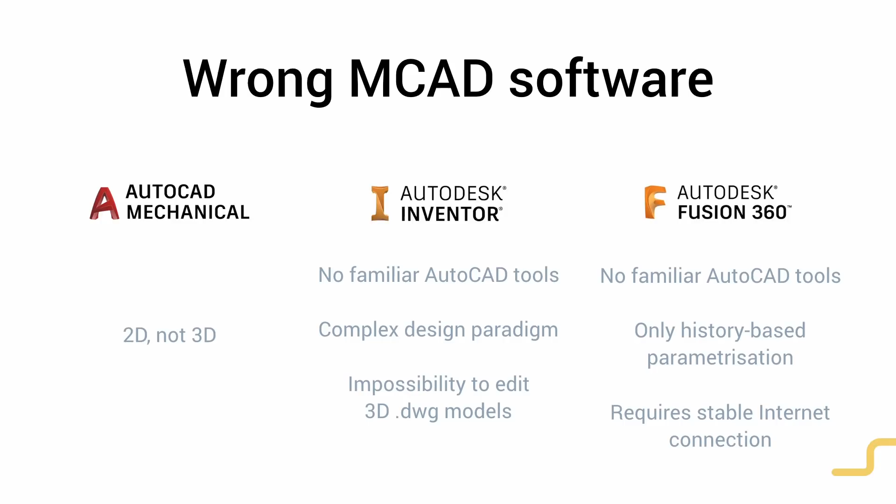What is the right choice? Let me list. First of all, of course, the right mechanical design software for DWG users should be AutoCAD compatible. It should contain all familiar tools on board. It should support Lisp and .NET and C++ API. It should allow you to run vertical applications and so on.

Also, it should be fully blown 3D, of course, not 2D. You should design parts, assemblies, sheet metal in 3D, and you should generate drawing views from 3D models, not draw them manually. It should be easy to learn, intuitive and powerful. Easy to learn means that it should be familiar to you. Even before you start to use it, you already know a significant part of this software.

And of course, it's very important to edit any existing DWG 3D solid geometry, but also any imported 3D geometry, because there is a lot of 3D mechanical design software on the market, and you cannot avoid collaboration with your suppliers and partners. They will definitely use some other software like SolidWorks, Solid Edge, CATIA, Creo, and so on. And you have to be able not only to exchange data with them, but also to edit imported geometry. That's very important.

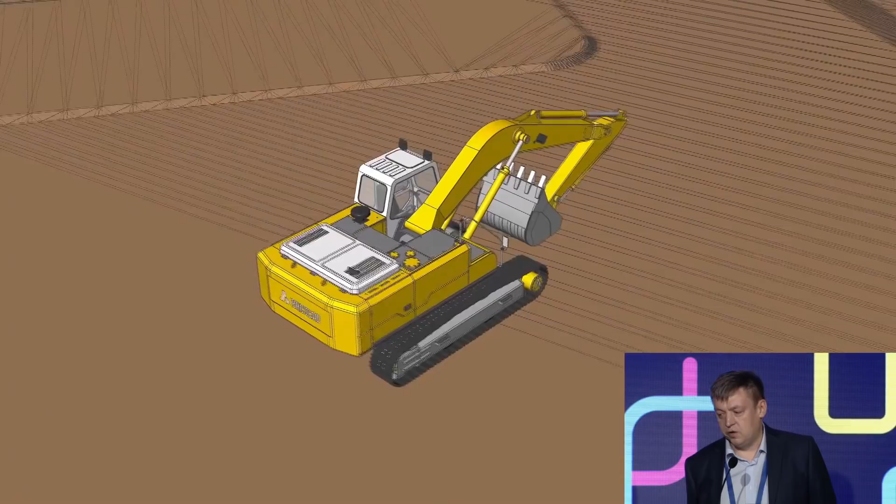And now, let me present the main hero of our session. This is the 3D model of the excavator. We created it in BricsCAD from scratch till the last bolt and nut. We assembled all parts together. They are parametric. We modeled all kinematic joints. And this movie was recorded using the BricsCAD AnyPath tool, which was extended in version 19 with the possibility to make parametric animation. In a couple of seconds, you will see this excavator start to move.

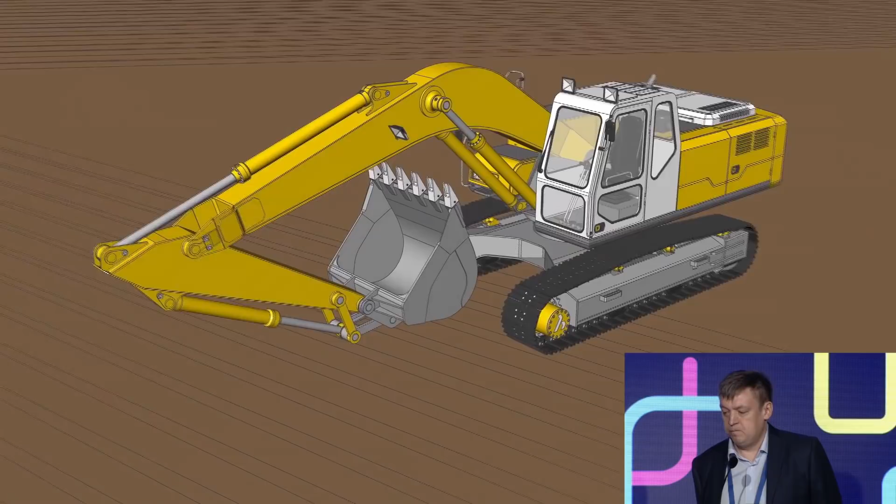And this movement is driven by parameters. We specified connections using expressions. We specified links between different parameters, and it allows us to model that. In fact, we modeled everything, including, for example, this planetary gear joint. So it's possible with BricsCAD with no problem. Of course, we also modeled the main purpose of this excavator. It should move its boom and bucket and do its job, and of course, this is also possible. This is modeled.

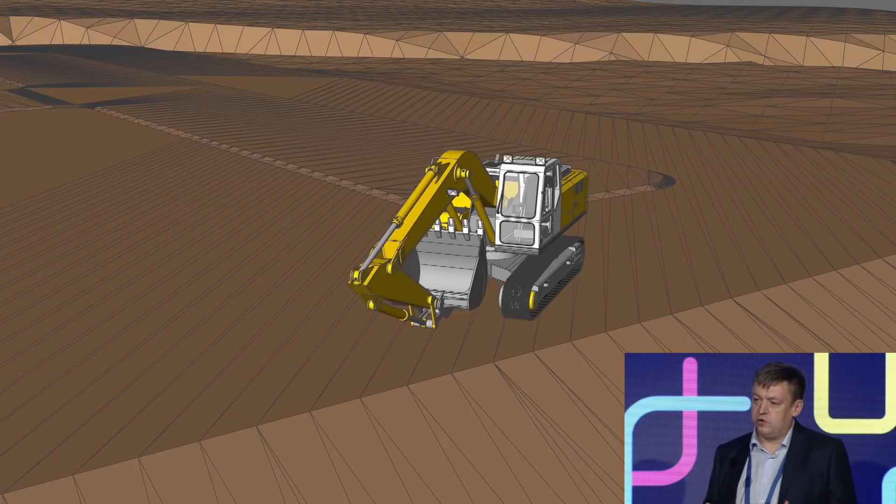Okay, the rest of our session will be just a live demo of different aspects of the BricsCAD Mechanical product. We are going to start with showing you some possibilities of direct and parametric modeling in BricsCAD. And to do that, I'm inviting on the stage my colleague, Alexey Kazakov, who will show you, with the help of another colleague, Ilya Tadarnikov, how easily it can be done in BricsCAD Mechanical. Okay.

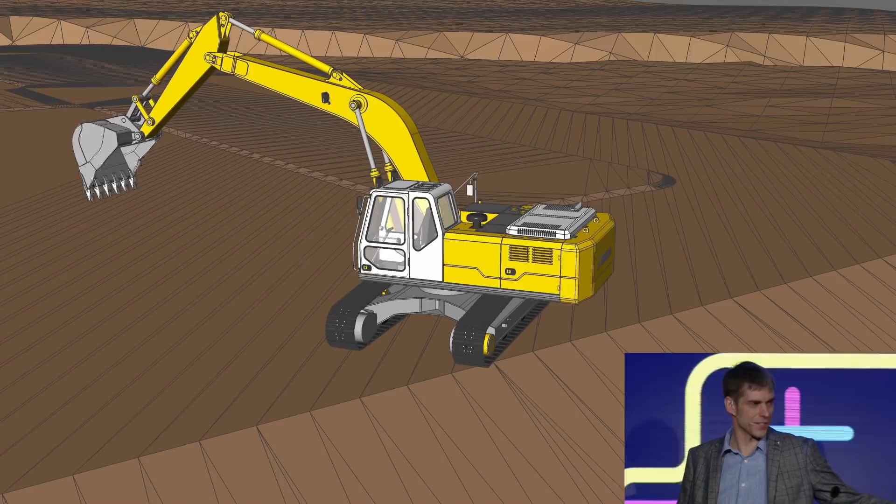Well, Dmitry, thank you for introducing me. Together with my colleagues and Dmitry, I was involved in development of the parametric toolset and direct modeling toolsets from the very beginning. And now I'm really happy to see how the area of applications of these tools extends. But now we're going to focus with Ilya on demonstrating how parametric design, 3D constraints, and direct modeling can be applied in a mechanical design context.

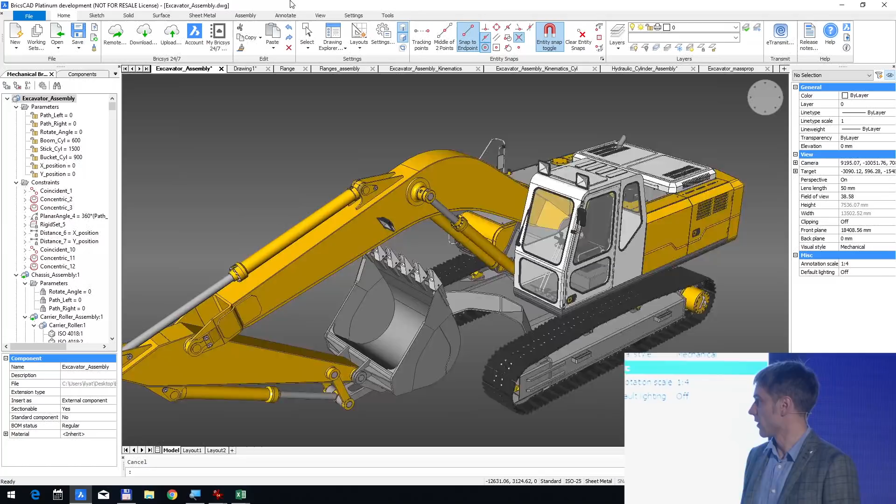So let's turn back to our model of the excavator and assume as an excavator manufacturer we're going to create a customized version of this model for one of our clients who intends to use it for, say, trench digging. This target requires replacing the bucket model with a narrower version than the one currently installed. And we will show how direct modeling can be applied to customize, to change this bucket.

Let's start changing it, and we start from the original model we received in SolidWorks format. We import it using our Communicator product, and now we will use the direct modeling toolset to change it. Direct modeling assumes that the designer interacts with the model using selection and direct manipulation of faces. So that's why selection tools are very important. Here, Ilya started with the assembly model, and to make it editable, we have to explode one of the components to get 3D solids. So this black bucket model, the bucket solids, will now be changed.

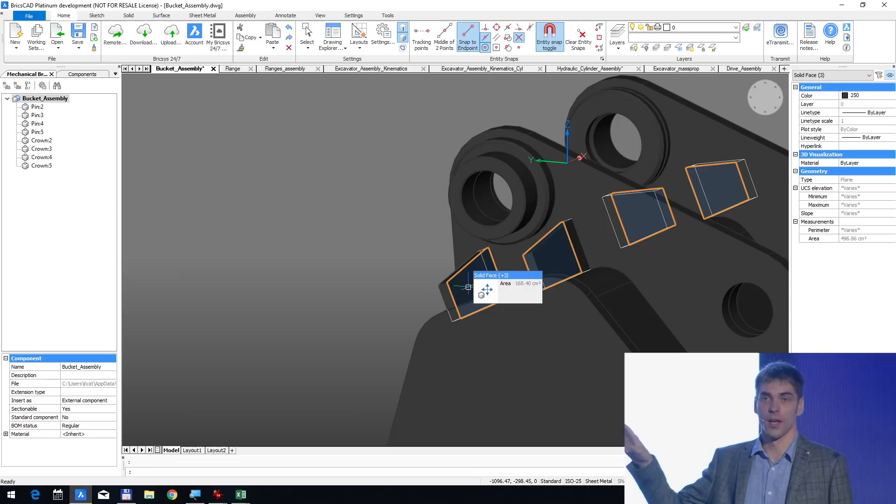Here you see this important selection tool where you can set your view correctly and use window selection to select precisely the faces and solids you need. And afterwards, using the manipulator object, we just displace the faces by the required distance. That's how this object can be changed and how the bucket can be made more narrow. An additional modification that we are showing now is extension of the stiffener at the top of the bucket to make it stronger.

And this is done using extrusion, and while extruding you can type the values or use snapping, whatever you need. All the power of all the regular tools are also here. So that's how we created a more narrow trench-digging version of our bucket.

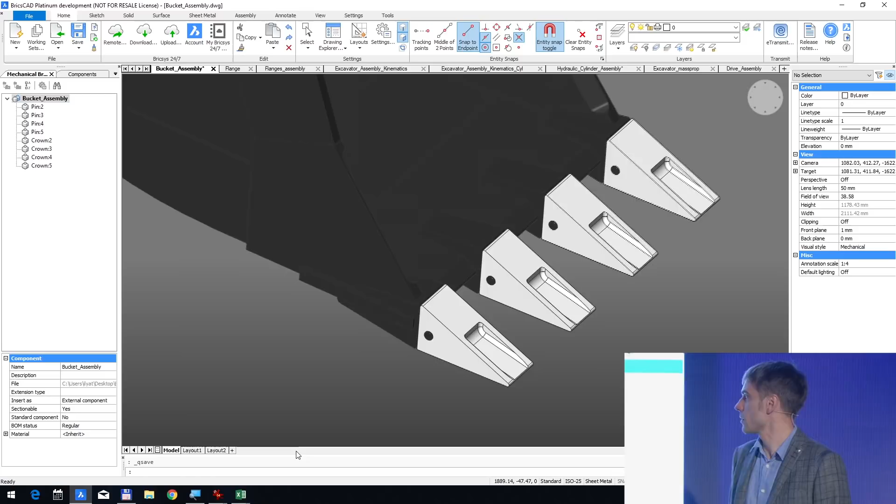And now another thing, let's assume that our client is going to use this bucket in conditions where a lot of rocks are met in the soil, in the ground. And that's why we need to customize one of the tools, or we better call it tooth crown, as we're in UK. So that's tooth crown, we're going to customize it and change it to make it of very specific form. So first we extract the profile of one of the side faces to start from, and hide the original object to not obscure the view.

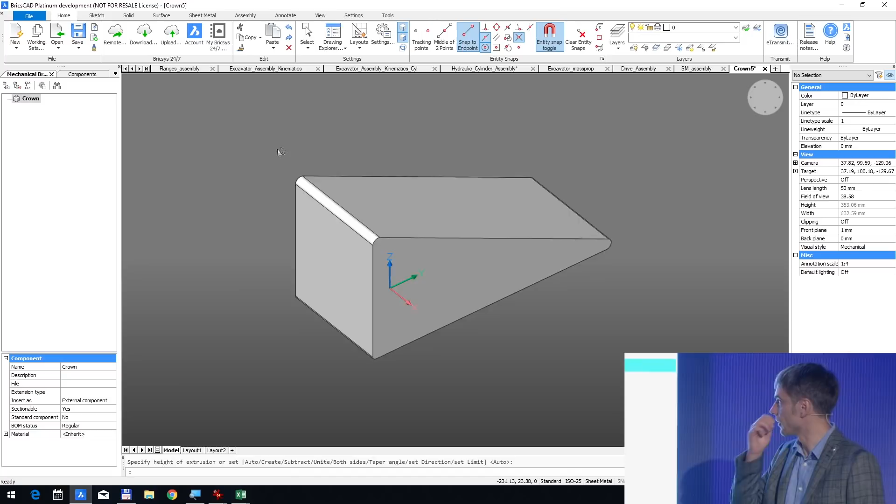Using this profile, with the native regular extrusion command, we create the basic shape of the back of the tooth crown, and then there is another selection tool which is quite useful especially when working with imported geometry. It allows you to select and remove fillets of specific radius. This is what Ilya just did, and removing fillets is quite important because otherwise their presence can complicate the direct modeling.

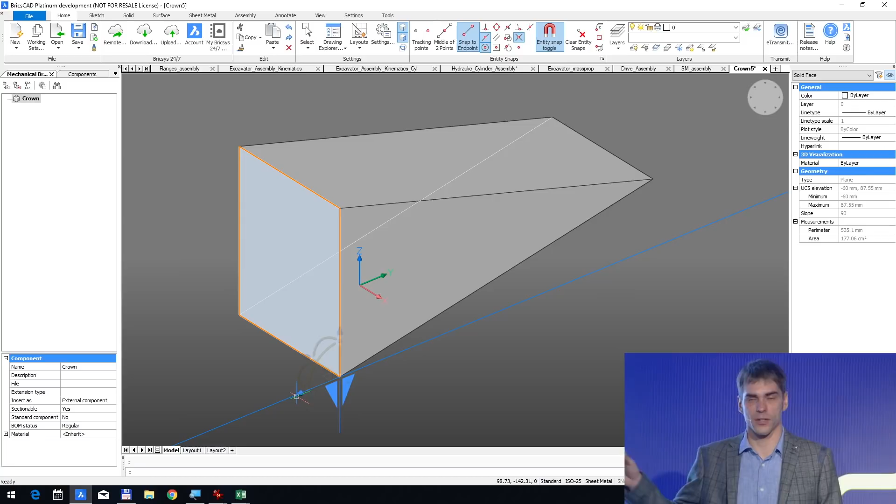Now we are changing the angle to get the required shape of the model, and this is something very basic, and you in fact cannot do too much with such shape because it just does not have enough faces. And one of the ways we found to make it more flexible, to introduce more faces to this object, is imprinting a copy of the back face on this model, and imprinting gives you additional edges and faces that you can use to reshape this object.

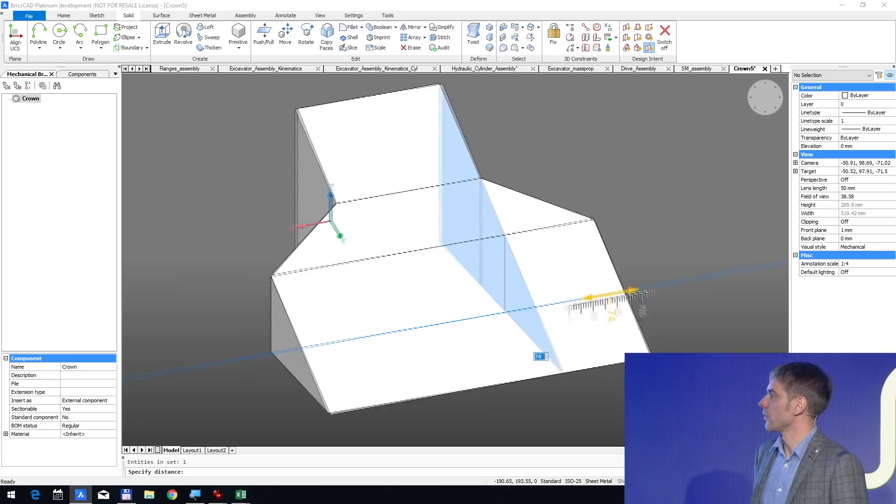After these copies of the back face are imprinted, the regular push-pull command can be applied, and the shape of the tooth crown can be changed as we need. Also, these additional faces can be rotated a bit to get the required form.

Well, okay. So next we will show how.

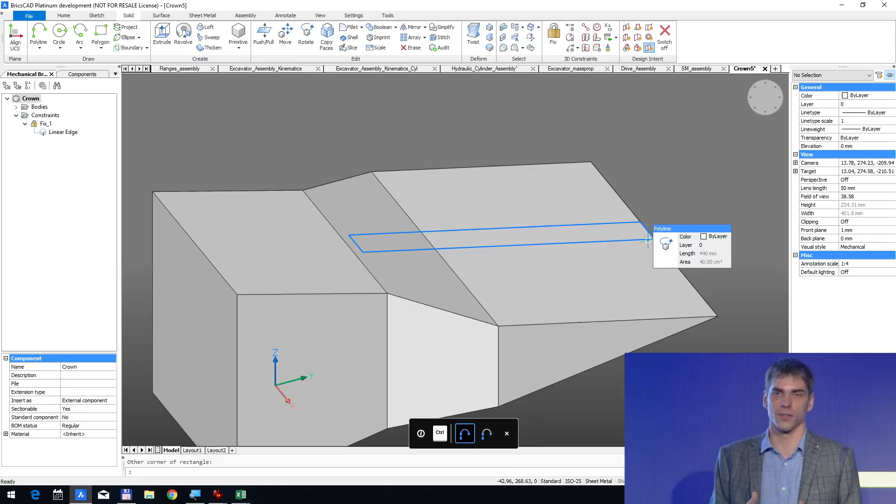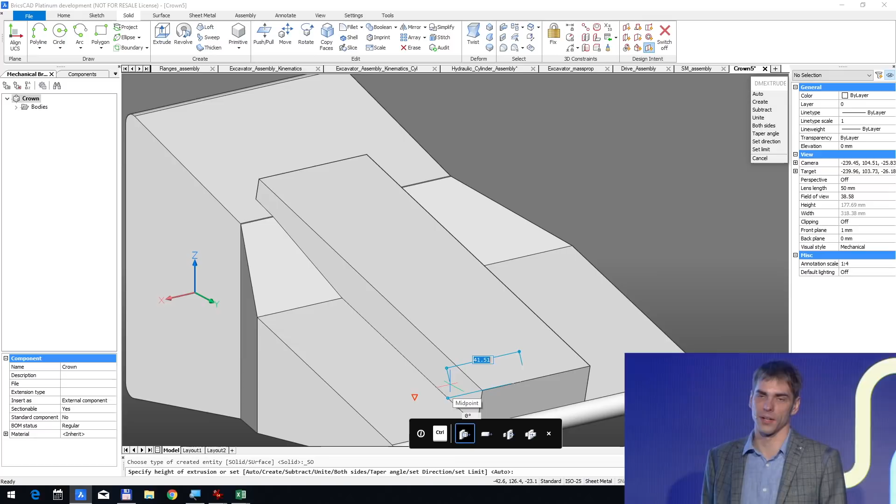Next thing required by our design is introducing an additional protrusion feature, which can be easily created using the rectangle command combined with dynamic UCS detection. As soon as you start drawing the rectangle, the system automatically selects the face of the solid under the cursor, which allows you to create the rectangle easily and fast. And as before, while creating the rectangle, all snapping is available, which makes it very familiar to regular DWG users who already know which snapping modes exist, how to use tracking lines, etc., how to use regular drafting commands.

After this extrusion is created, side faces can be rotated using the quad tool and specifying the required rotation angle. So now we created this protrusion feature, and there is another selection tool which allows you to select a protrusion in just one click. You select it from quad, and after these faces are selected, what to me looks like one of the most interesting features we recently introduced: the possibility to copy a feature of a 3D solid from one place to another. This is what Ilya is doing now, positioning a copy of this protrusion feature on another side.

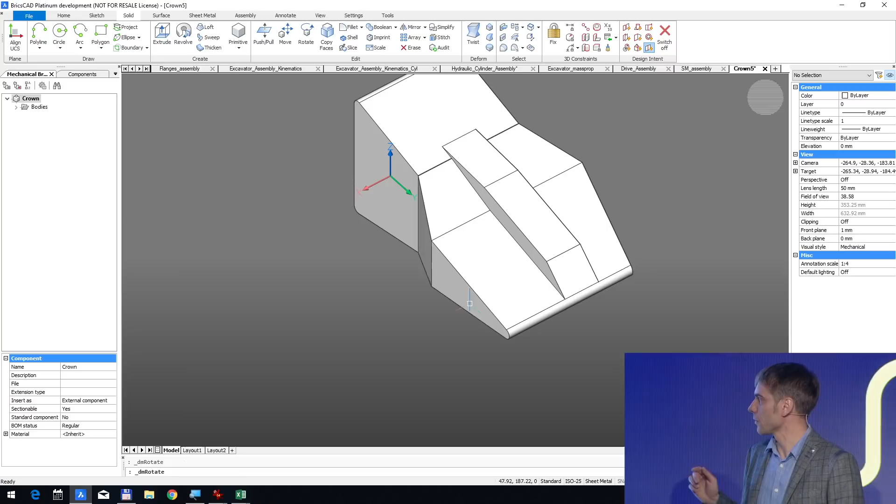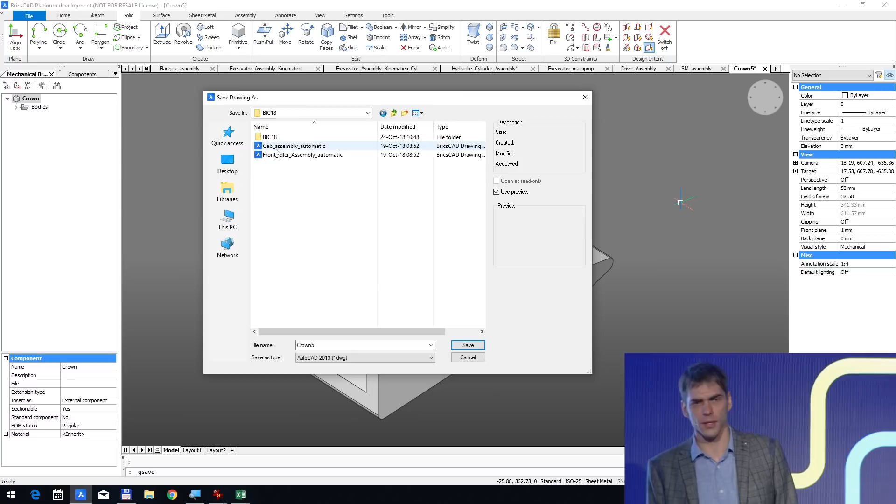And now some final modifications. What remains is to add the mounting opening on the back side of the tooth crown to be able to fix it on the original adapter of the bucket and have the complete design. For this, Ilya used the depression selection tool, which automatically selected the faces of the opening, manually added the selection of hole faces, and just copied this opening to our new version of the tooth.

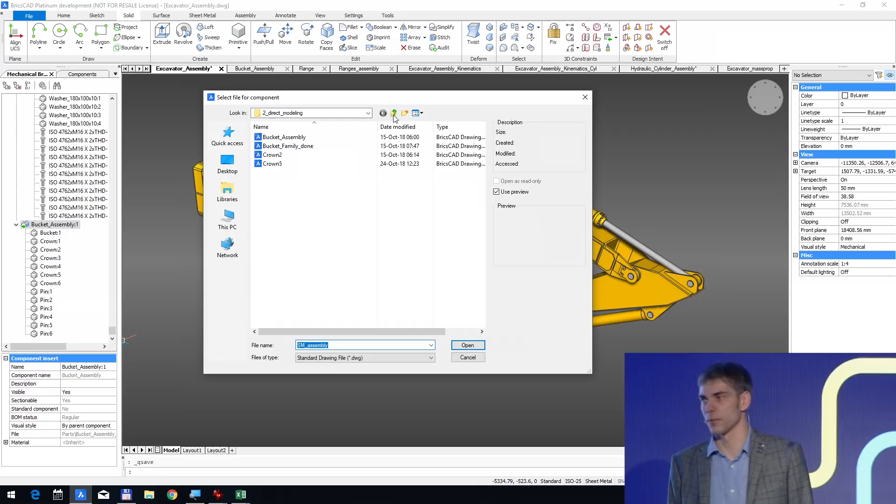Now it's time to save this new model under a new name and update the parts on the assembly level to see how it impacts the final design. Here we use the replace command in the mechanical browser, which allows replacing the tooth with its new version, which we assume is more fit for rocky environments. And one final step is replacing the bucket subassembly on the assembly level of the excavator. Yes, for this we use replacement.

Something, we have to find the correct version, right, Ilya? Okay, so we are done now. Something went a bit wrong. Oh no, that's fine. Yes, that's correct. Well, I was looking at the screen at a certain angle, so it looked to me that something is not correct. But yes, it's what we designed. This is what we did.

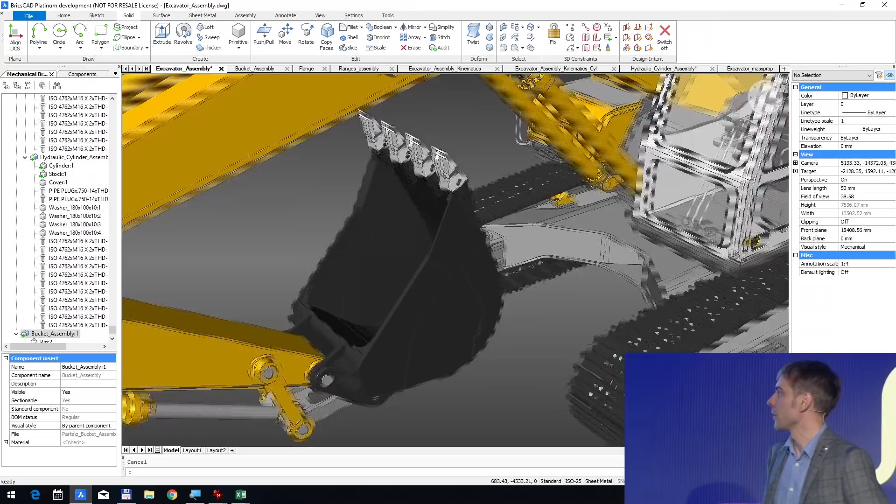Well, so this is what direct modeling is about, when you manipulate the faces and objects directly using different selection tools, using the native drafting commands, extrusion commands, and the manipulator, for example. Well, now what about parametric design? Parametric design is a paradigm where the designer controls the geometry using several numerical parameters.

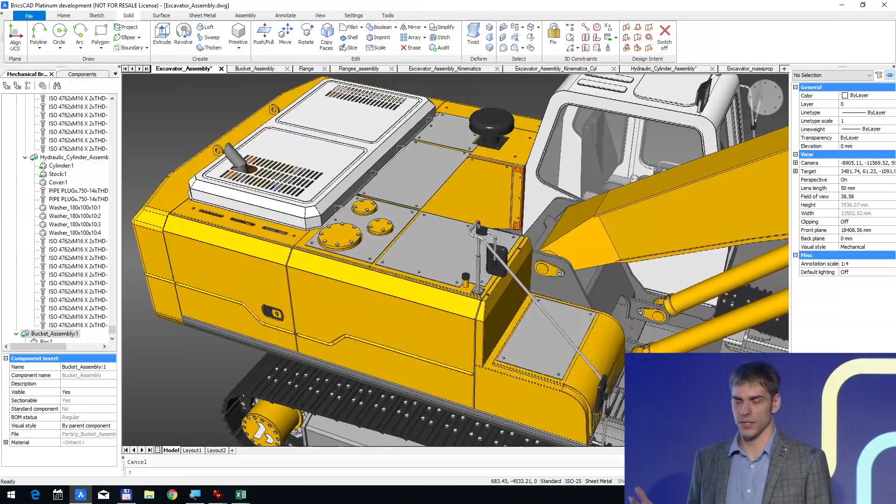In BricsCAD we implement this link between parameters and geometry using different driving objects like, for example, 3D constraints and associative arrays, and using these tools in BricsCAD, it's possible to create what we call parametric components. And we're going to show how to create one example of such parametric components, and we selected this oil filter lid assembly.

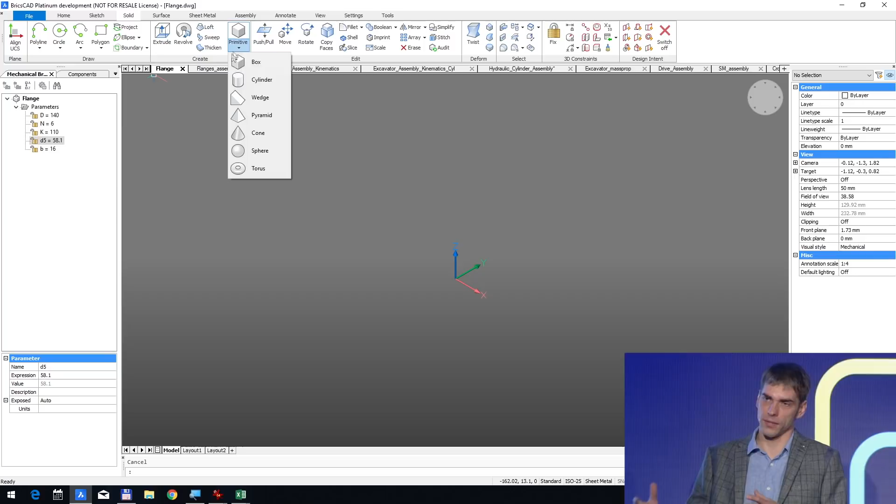Let's design one of the flanges of this oil filter lid assembly, which is normally controlled by a number of parameters like internal diameter, external diameter, and thickness. Let's start designing from the stage when these parameters are already defined on the level of the assembly and have some initial values, and let's see how we can link these parameters with geometry.

Generally, it doesn't matter in BricsCAD whether you create this geometry from scratch or you imported it. The parameters can be attached using 3D constraints just by selecting the corresponding faces of the 3D solid object in such a way that the parameter of the constraint starts to move these faces as soon as the parameter is changed. Well, this is how constraints are created manually.

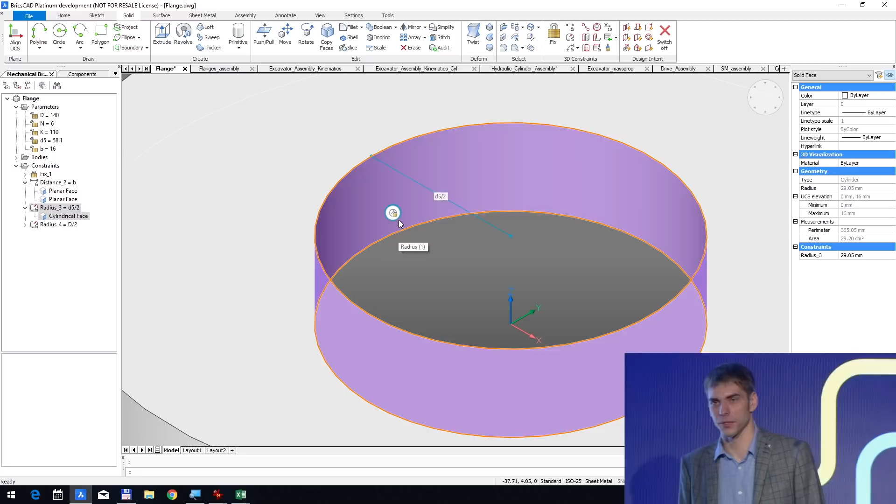You have seen that there is already an automated parameterization tool, which was used yesterday in BIM. As homework, you can try on such a model what it creates. That's more or less what we need. But here we show how to create constraints manually only for those faces which are involved. So here Ilya controls the internal radius with a radius constraint and thickness with an additional distance constraint. Well, this is how we created the parametric washer-like object. And what remains to complete the design of this part is that we need to position holes.

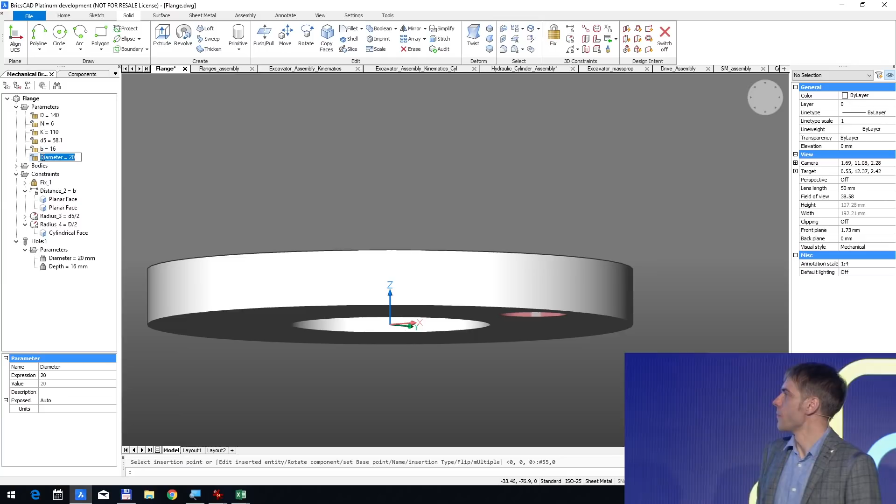On the left, let me introduce, once again in a mechanical context, the components panel, which now in V19 includes the most used standard mechanical holes, which are also internally represented as parametric components controlled by 3D constraints, with a specific property that these components are subtracted from the host solid on which they are inserted. These holes also have parameters which can be aligned, using the mechanical browser, with the parameters of the assembly to control the depth of the hole to make it correspond to the thickness of this flange or washer.

And another sort of parameter, as you just saw, is the number of holes, but it's completely different and it is not controlled by 3D constraints. We control it with associative arrays, and this is also a new feature of BricsCAD V19, where you can combine associative arrays, like in this case a polar array, with parametric components. So when a component is put inside a parametric array, its parameters are still exposed on the higher level, on the level of your drawing, and you can control the array parameters using the mechanical browser, as well as the parameters of each hole.

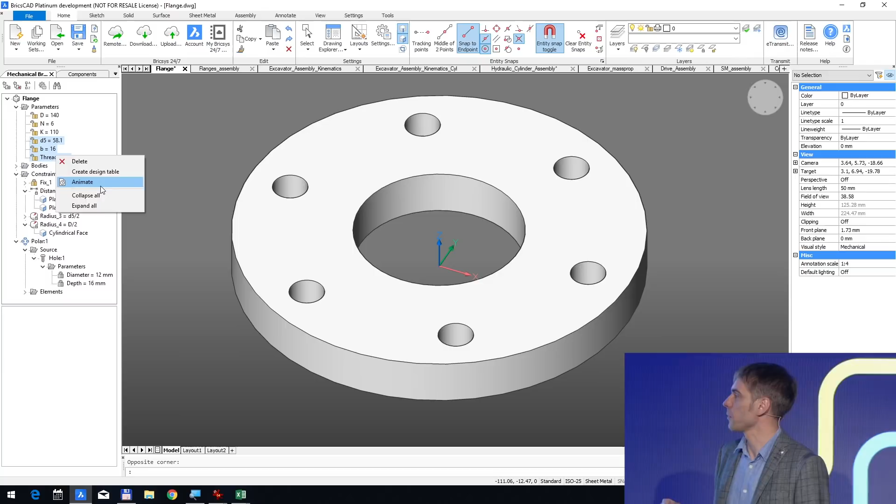Well, this is what we did, and using the animate command, you can see which parameters can now be controlled. Well, okay, Ilya, let's also change the number of holes, please. Yes, now we have 6 holes. If you make it 10, the system automatically recomputes the geometry. Well, that's simple, but that can already represent some standard part which you can use in your designs across your assemblies. And there is also a new feature in BricsCAD that allows what?

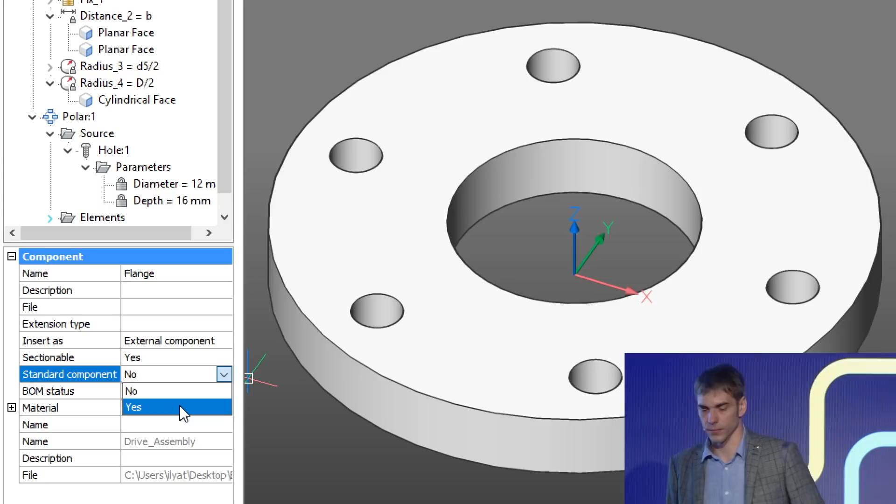Yes, which allows you to store this component in a convenient place for accessing it easily later. And this is again the components panel. Using the specific create component tool, you just select the solid and store it in the components library as a standard part, and it allows you later to incorporate this model into assemblies once again. So you can see that this flange model appeared as an icon in the components panel.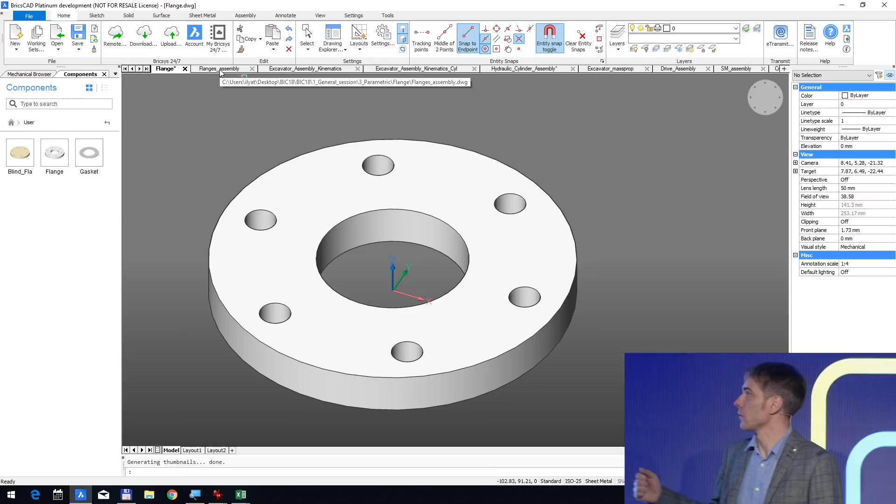We can also have a look at how easily you can use it just by dragging and dropping it into the new model. And so this is how the standard components library can be extended by your own parametric designs. Well, let's return back to the original assembly. So this is already an assembly which contains our part.

We created it in advance. Original assembly which creates 2 flanges and the intermediate gasket. And this is fully parametric. You can control all the diameters, number of holes, and all these dimensions. Well, but it's incomplete because it doesn't have the standard hardware inserted.

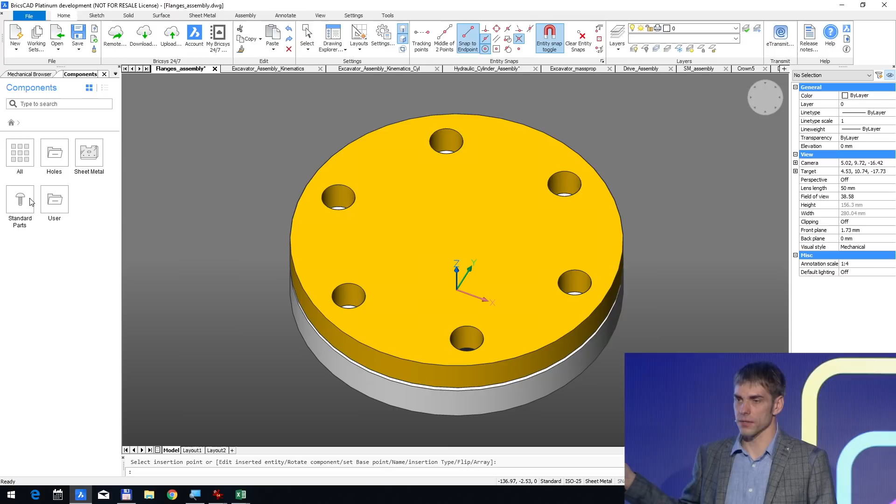The bolts are missed, and they are missed on purpose because we wanted to show you the reworked subset of the components library which is shipped together with BricsCAD V19, and this is a full, reworked library of our standard parts, which are now completely parametric. They can be controlled parametrically after insertion.

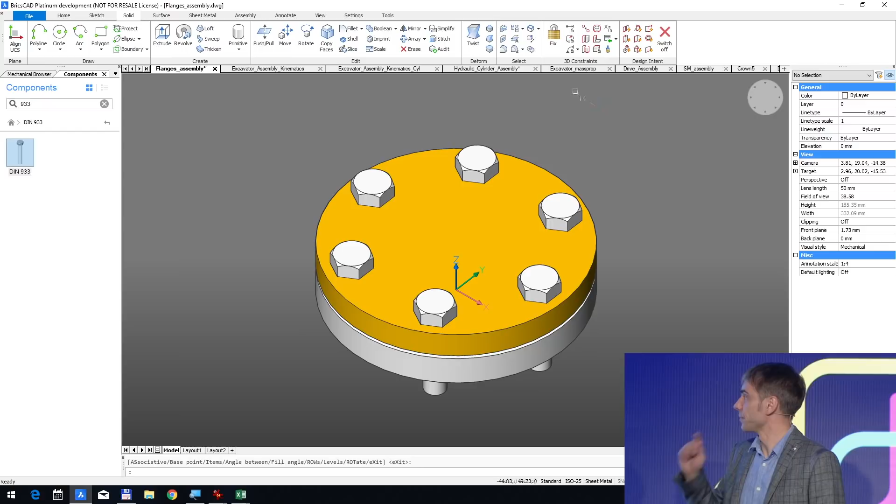Previously, you could only change the parameters of standard hardware at the moment of insertion, and also they are real parametric components, which means that they can be combined with associative arrays. This is what is now possible. An additional polar array is created, which creates repetitions, the copies of the standard hardware, of the bolts, to get the complete assembly.

Well, so we are close to having this assembly complete. Ilya now just sets the parameters of the newly created array using the mechanical browser. And now what's worth noting is that in reality, in manufacturing, due to cost effectiveness requirements and due to manufacturing restrictions, you do not have arbitrary radiuses or diameters for such sort of things. You can only use in your designs certain combinations of the dimensions of such objects,

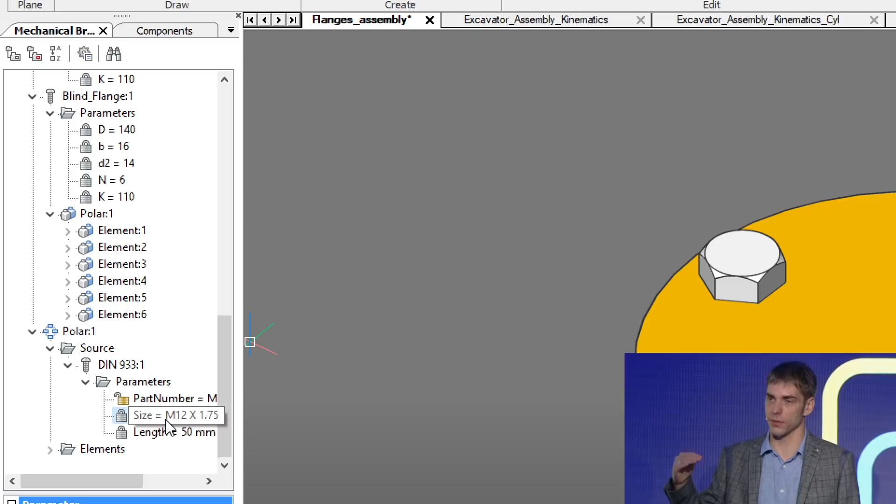and usually such configurations are referred to with some part number, associated with a part number, and very often, as here, this part number and configurations are defined in an Excel spreadsheet, which we can now attach to the geometry using what we call the design table tool. We associate this, and as soon as the design table is associated with our parameters, a new parameter appears in the mechanical browser, which controls all the dimensions of this part.

And to change the dimensions of this part, one can just choose from the drop-down list the corresponding value of this configuration, and the system automatically recomputes the geometry. So this is how spreadsheets can be used in BricsCAD to provide specific configurations.

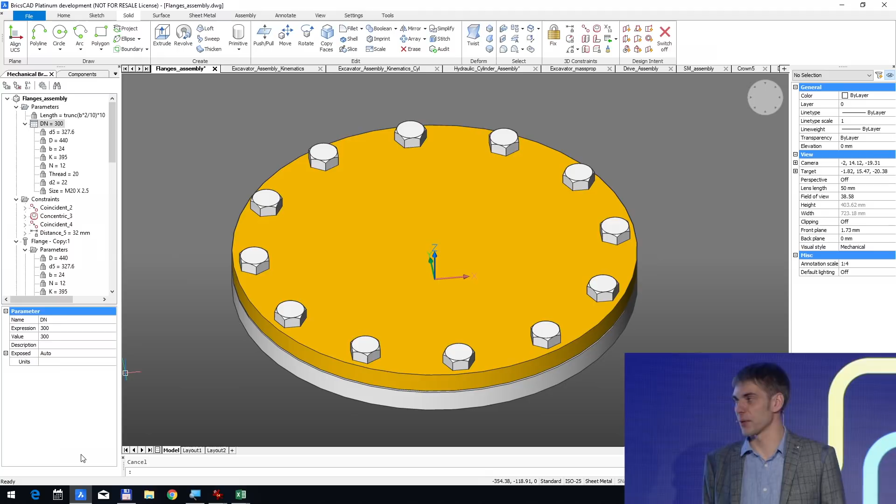Well, so we are close to the end. We've just seen how constraints give you freedom to design only once and then generate all the required configurations very fast and easy. So thank you. That's what we wanted to show about direct modeling and parametric design with 3D constraints and associative arrays. And now I give the word back to Dmitry, who will show you even more amazing stuff. Thank you very much. Thank you.

Thank you, Alexei. You're probably aware that designing is just one part, important of course, but just one part of mechanical design software. Another important part is the possibility to analyze your design before it goes to production. You have to analyze kinematics, you have to compute mass properties to see the center of gravity, probably do finite element analysis and so on. And now we are going to show you in brief some possibilities for kinematics analysis in BricsCAD.

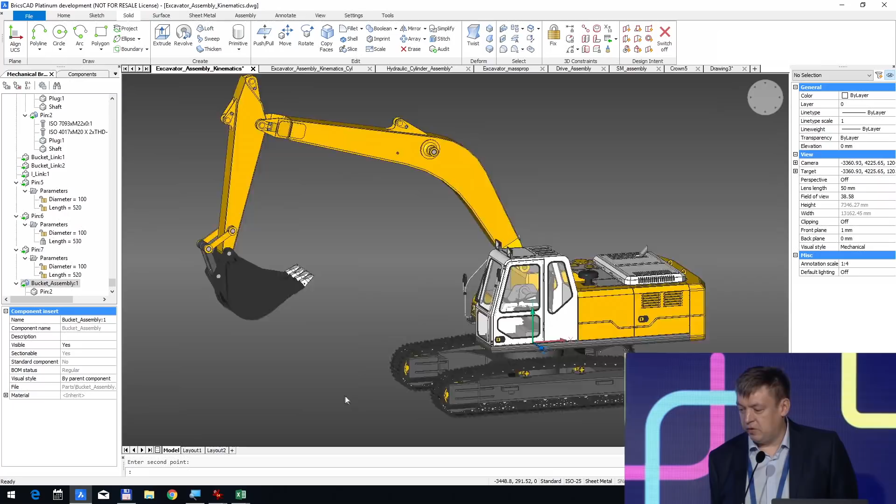Of course, when you design such things as an excavator, you are interested to see how your bucket can be moved. And it can be done with the move tool in BricsCAD. But you see that if we start to move it, oops, our boom started to move as well. That's because we forgot, but we did it intentionally, of course. We forgot to create an assembly joint between the boom and the upper platform.

It can be easily done by creating a concentric constraint between the cylindrical faces of the hole on the boom and the pin on the platform. And if we do that, we will see how we can model the kinematics. Of course, the same concentric constraint exists between the boom and the stick and between the stick and the bucket. And now, if we move the bucket, you will see that the full mechanism is moved, and you can analyze this.

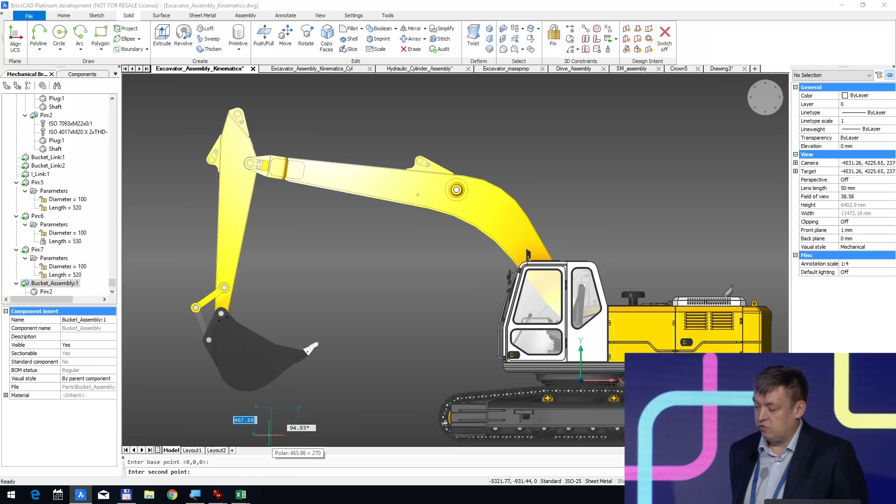What we are watching now is called inverse kinematics, and we do it in real time in BricsCAD. So you can check collision, you can check the reach of your bucket and make some design changes if needed, and so on. But of course, in reality, the movement of every element of this boom is driven by hydraulic cylinders. Inside every cylinder there is a piston, and when the piston goes outside of the cylinder, it forces the connected part to move. And let's see how easily we can model it in BricsCAD.

First of all, we have to convert our pistons to parametric components. To do that, we create a distance constraint between two cylindrical faces on both ends of this cylinder. But for the user, this distance has no meaning.

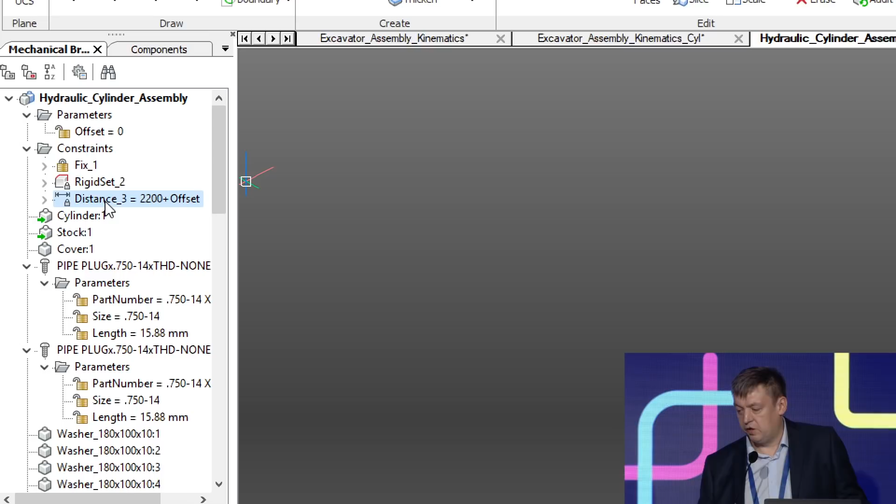For the user, what is important to measure is the offset of the piston, the value which the piston goes outside of the cylinder. And we can specify this parameter offset, and we can say that the distance is equal to its current value plus offset. And now, if we change the offset value, we will see that the piston will be moved. And before saving this model, we can animate it to see that, yes, it works.

Now we can save it, and we are going to update our excavator model. And with this update, all hydraulic cylinders will become parametric. You can now drive the offset of any of these cylinders. And we are going to show you how we can now link the offset of two main cylinders, which are connected with the boom, with one global parameter, because these two cylinders should be moved together.

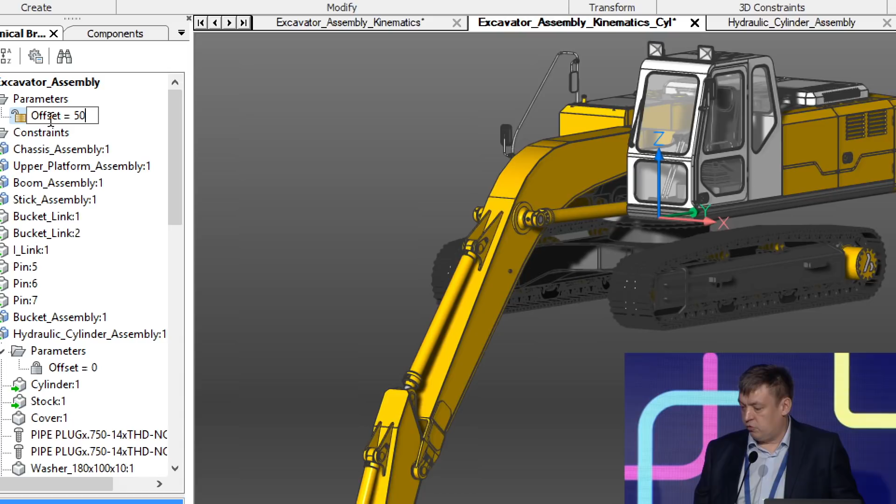So Ilya has already done it, and when he changed the value, you see that the boom is moved according to the assembly constraints we specified before, and in the same way we can animate it. Of course, we will skip the same for other cylinders, but now you have the idea how we modeled the kinematics of the moving excavator demonstrated in the movie in the beginning of this session. Okay, it was, by the way, direct kinematics analysis.

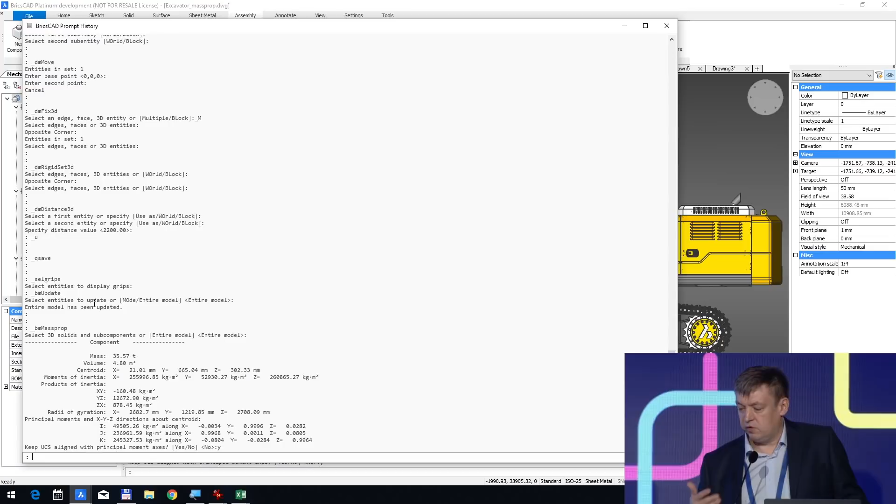Now let's consider another important feature of BricsCAD, the possibility to compute mass properties of your product. This excavator is composed of many parts, and every part is made of its own material with different physical properties, different density. So you cannot judge the mass looking just at the volume. You have to compute the total weight taking into account the density of different materials, and we can do that with BricsCAD. You see that the total weight is about 36 tons.

And what is also important, this tool allows you to compute the center of gravity of this excavator, and now the UCS icon is moved to the center of gravity, and you can estimate the stability, if your model is well balanced or not. Maybe some design changes are needed. For example, we can rotate the upper platform 90 degrees and remeasure mass properties to see if this is a stable position or not.

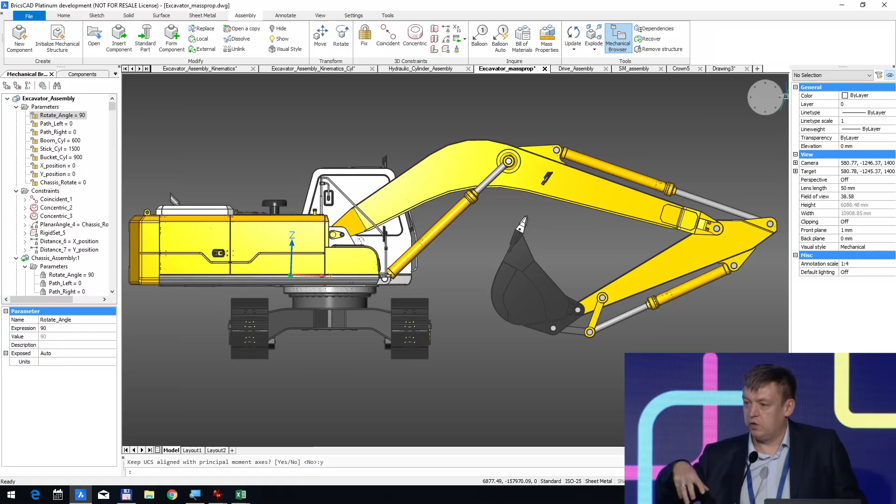And if we switch to the front view, we see that it was even slightly moved to the left, because on the back of this upper platform we have a counterweight, as you probably know, which allows you to have a good balance for the excavator. With this tool we can also compute the maximal declination angle and write an instruction that you should not put the excavator on more than 30 degrees or so. Okay, it was just a brief overview of analysis tools in BricsCAD.

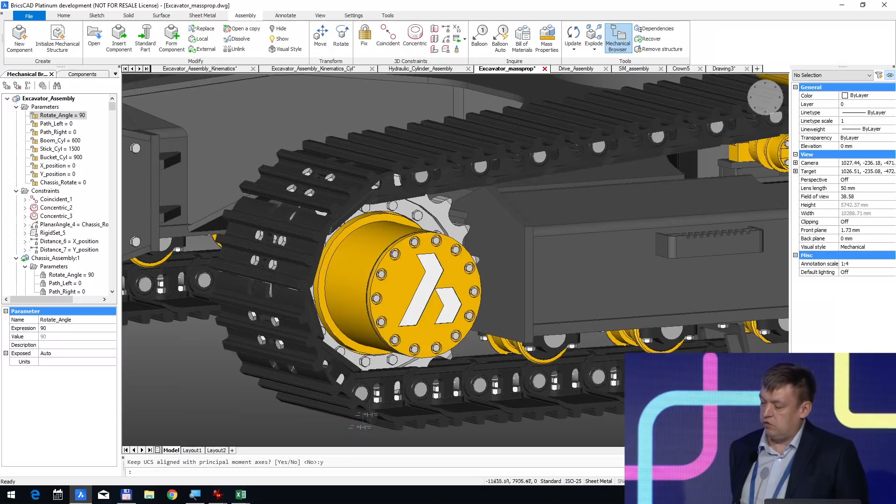Let's now move forward and speak more about generation of technical drawings. But first, I propose to take a look at the bill of materials of this excavator. We will not take your time waiting while it is generated. We generated it before. It lists all parts and sub-assemblies of this excavator. By the way, it's a new feature of V19, the possibility to generate a hierarchical bill of materials. Previously, we generated only parts or assembly level bills of materials.

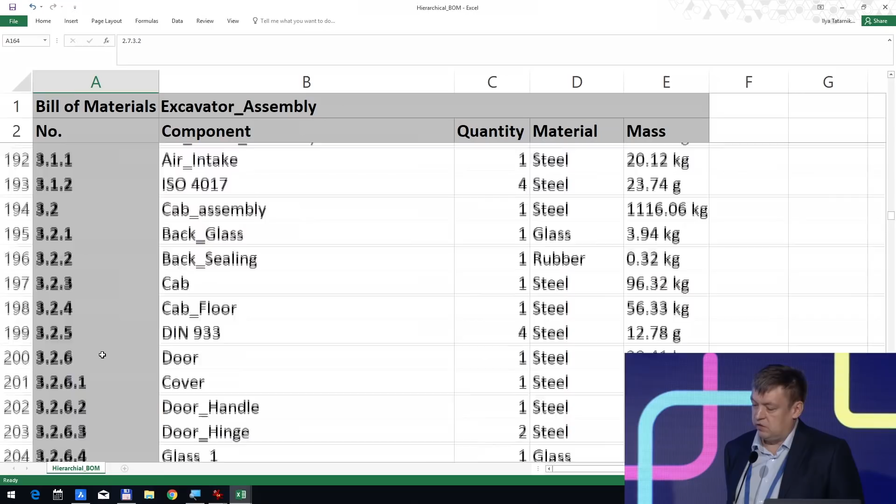Now you can see the part number displayed as several numbers divided by a dot, and you can see nested assemblies and sub-assemblies and parts. You can see their quantity, their name, materials, mass, and you can see parameters if needed, and so on. In total, we used over 500 different types of parts and sub-assemblies here, and if you see the total quantity, it's over 3,000. So it's quite a complex model.

And that's the reason that we will not use it to generate production drawings. We rather take one sub-assembly. But this is a very complex sub-assembly as well. This is this drive mechanism, which contains planetary gear transmission inside. Let's see how easily we can create technical drawings for this sub-assembly. We start with generation of base views. In that case, it's a front view and top view.

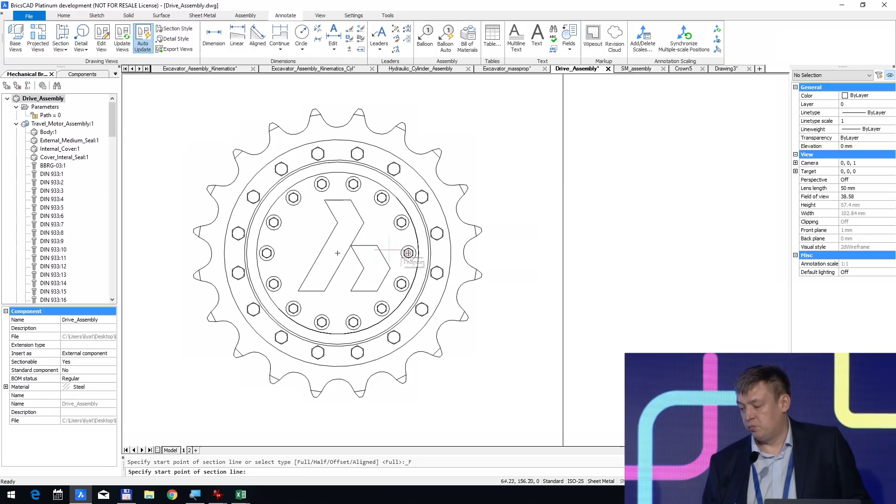And now, based on these views, we can generate additional drawing views, for example, a section view or detail view if needed. In that case, it makes sense to generate a section view because inside we have many parts. It's quite complex, as you saw in the movie in the beginning of this session. And we will see on this section view that every part has its own hatch angle, which allows you to easily distinguish them. If they are made of different materials, we could see different hatch patterns applied as well.

And also, following international drawing standards, we do not section standard parts. Ilya has just switched to 3D to show you that bearings and bolts are not sectioned. Of course, it's a configurable property of every component to be or not to be sectioned.

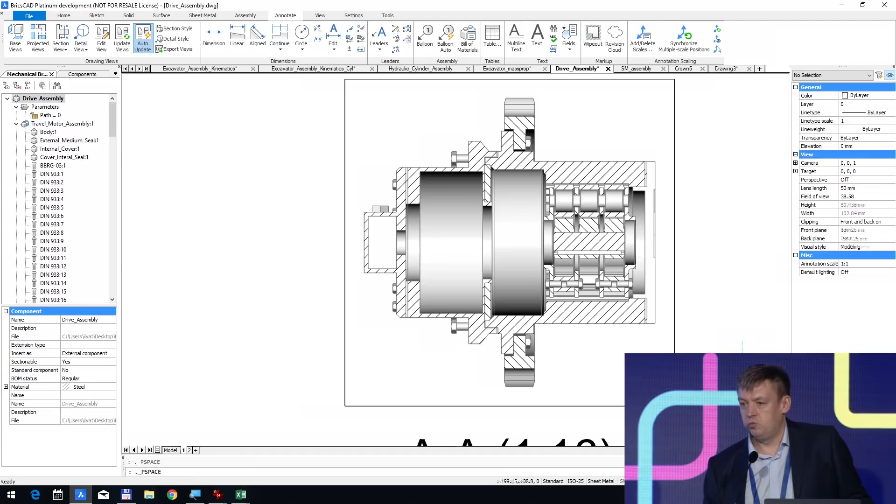Of course, making such sections is just one way to explore what's inside your assembly. But the most evident way is to create an exploded view of the assembly. In other mechanical design software, you create these exploded views by hand. You have to move one part after another. In BricsCAD, it is done automatically now. Ilya has just moved his mouse, and all parts are disassembled, taking into account possible physical collisions between them. So it models a real disassembly sequence.

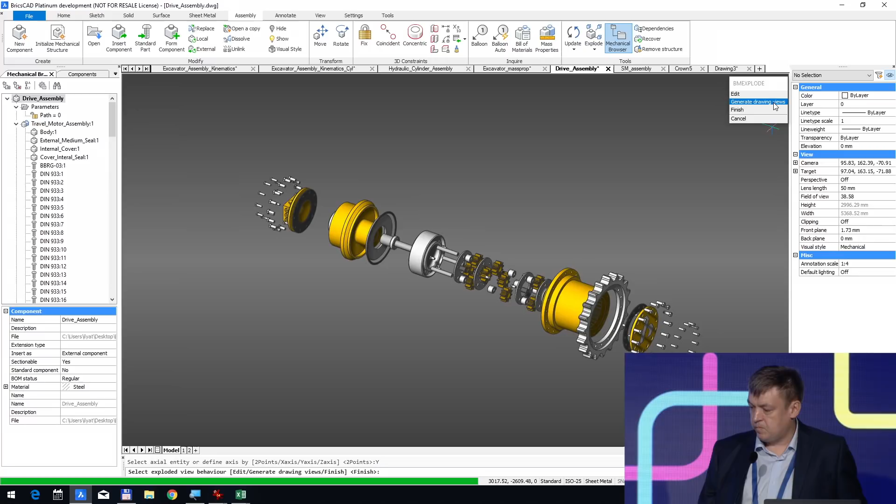We will generate a drawing view from this, but I just want to say that behind these technologies, there are many other features. We are very limited in time for this general session, so I'm inviting everybody who is interested to attend our in-depth technology session after lunch, when we will show much more about this automatic exploded representation, including animation of the disassembly sequence. And now Ilya has just placed this exploded view on the paper space.

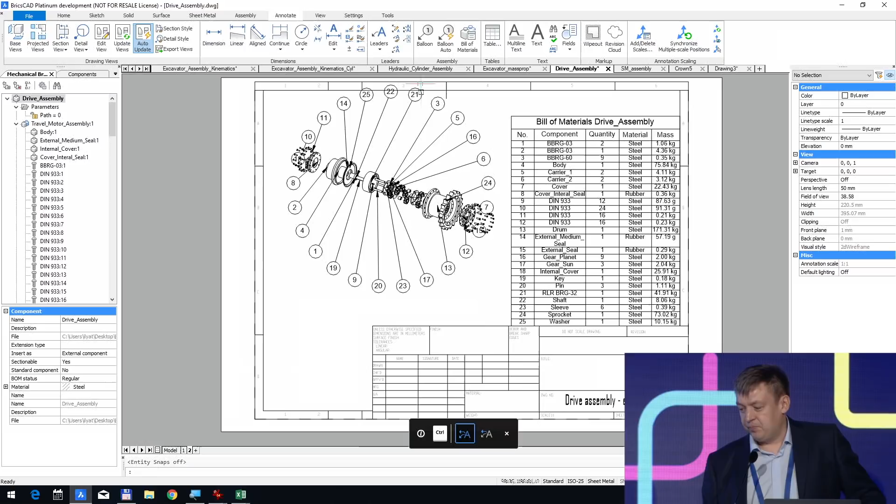And one more new feature of BricsCAD V19 is the possibility to annotate all these parts with just one click. You can create balloons in just one click. Previously, you had to create every balloon manually. And also, we supported the possibility to align balloons, in fact, to align any multi-leaders according to any curve. In that case, for example, we can align them along a polyline, and using some sophisticated algorithm, we create a special representation which allows to avoid intersections between leaders.

Okay, it was just a brief overview of what we can do in generation of technical drawings for mechanical assemblies. And now I'd like to invite on this stage my colleague Christian Lecomte, who will give you an overview of sheet metal possibilities in BricsCAD Mechanical. Thank you.

Thank you. So, I am Christian Lecomte, and I have been in the business of sheet metal CAD for more than 32 years. That gives you a big clue. I am older than 32. And there is another clue, my accent. Despite my effort, I cannot hide my nationality.

So, first, let's see how to create from scratch. We start from the upper assembly. And you will see that those two parts are missing. So we will create them from scratch. And we create them on the assembly. And we will use the existing part to be sure to fit to the assembly.

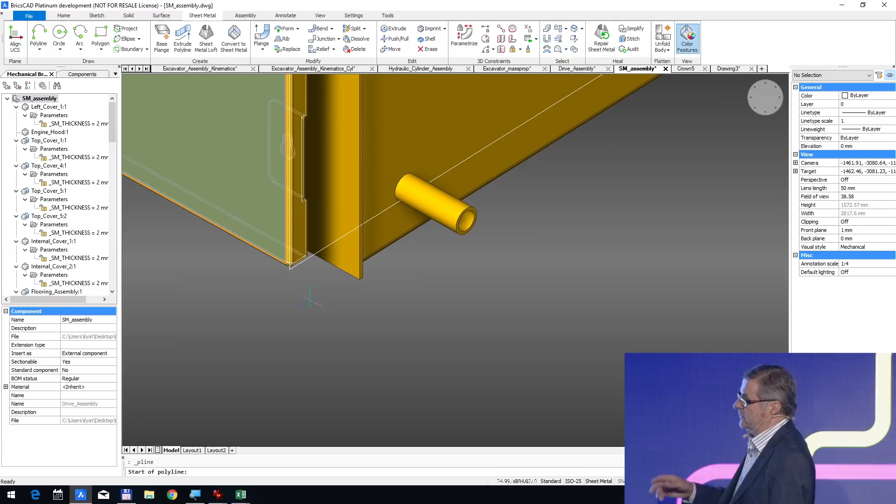So first, we create a profile in this direction. We help ourselves with the existing part. And now we will create another profile in the other direction at 90 degrees. So we can also use some points of the assembly and give the dimensions that we need.

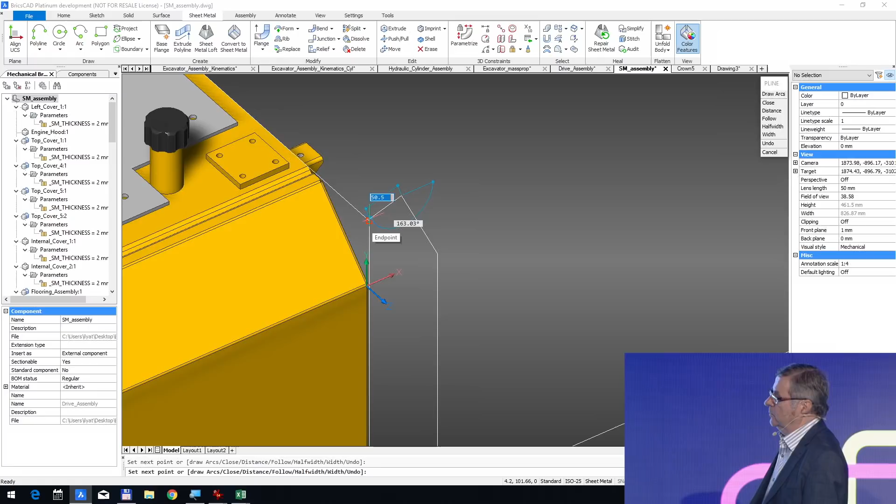Okay, this is now how to create the second profile. You will see that if we make a mistake, for example, for the height, this is not a problem because we will use the trick of combining two extrusions. Then we will finish the first profile by adding a fillet. No, chamfer. I told you.

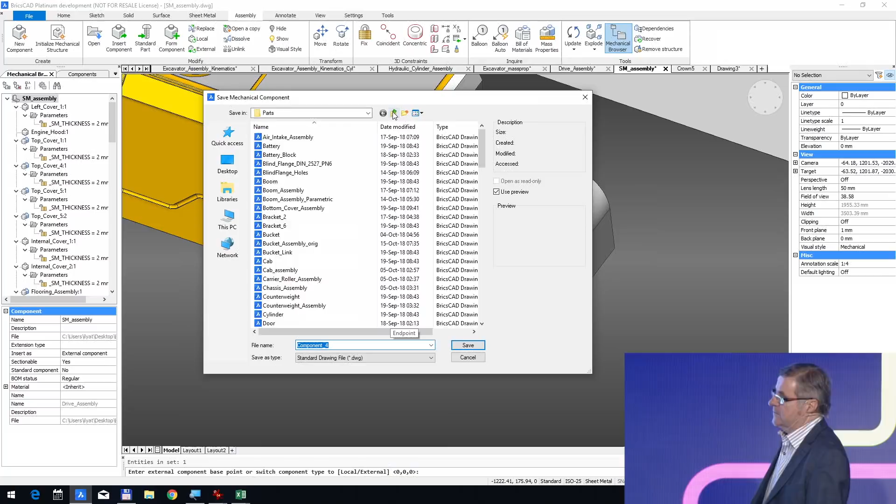So now, two extrusions, and then we will combine those two extrusions, and we get the solid. But it's solid, it's not sheet metal. Then we will, of course, isolate this solid and cut it in two, because the result must be two parts. So we will cut this solid in two parts, and then it's still solid, and we will shell to get something with a constant thickness.

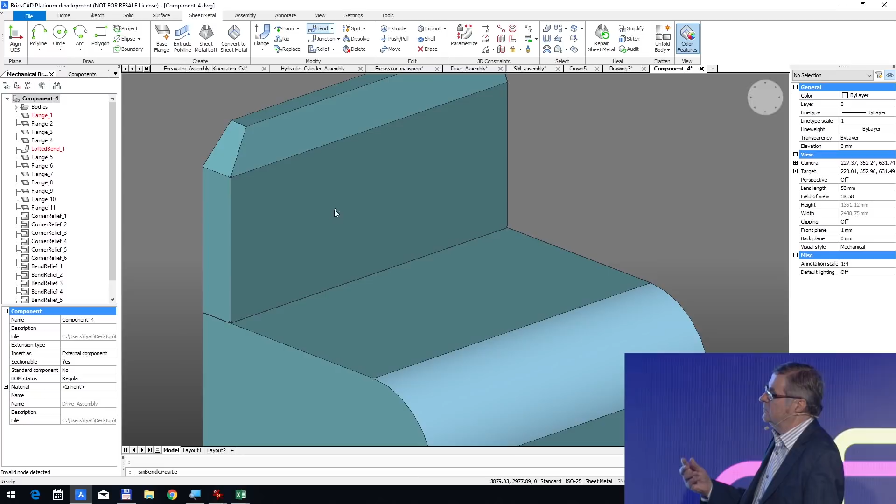And then we will apply our powerful sheet metal features. Then just by clicking, we have all the bends created. Automatically, the junctions are created, and we can switch a bend to a junction to be accurate. Then we can add on the back 4 new flanges, 5 new flanges, and you see that the miters are created automatically.

It's magic. So, and of course, the part can be unfolded. You see how fast it is. The second part, we will create 2 bends.

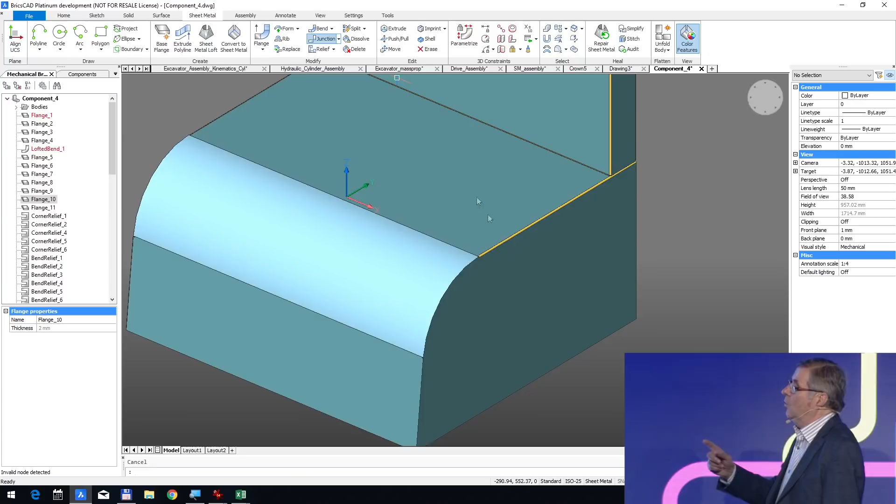We choose to create 2 bends, and then we will create automatically all the junctions. And you see, it's very important, we create junctions not only on straight lines, but on curves. And that's unique. And then we will create also those 3 bends, 3 parts, 3 flanges. Okay, and it's finished. And this can be unfolded.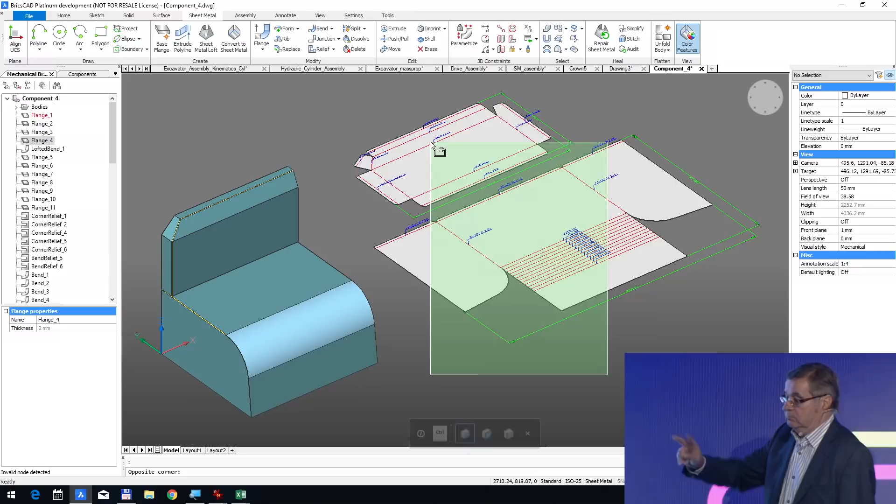Of course, the big bend is recognized automatically as a lofted bend, so made step-by-step bending. Of course, you can change it if you want, but by default, it's like that. So now, in the assembly, we will replace the solid by those parts. This assembly now is ready to be manufactured.

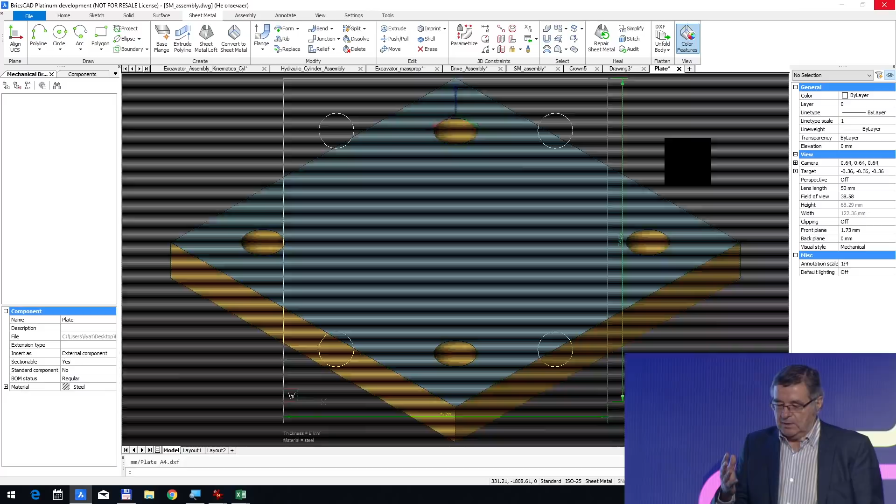So we will complete the second goal, produce the documents and material for manufacturing. So we will launch the batch application that will examine all the parts, sort the parts between sheet metal and non-sheet metal. The sheet metal parts are automatically unfolded.

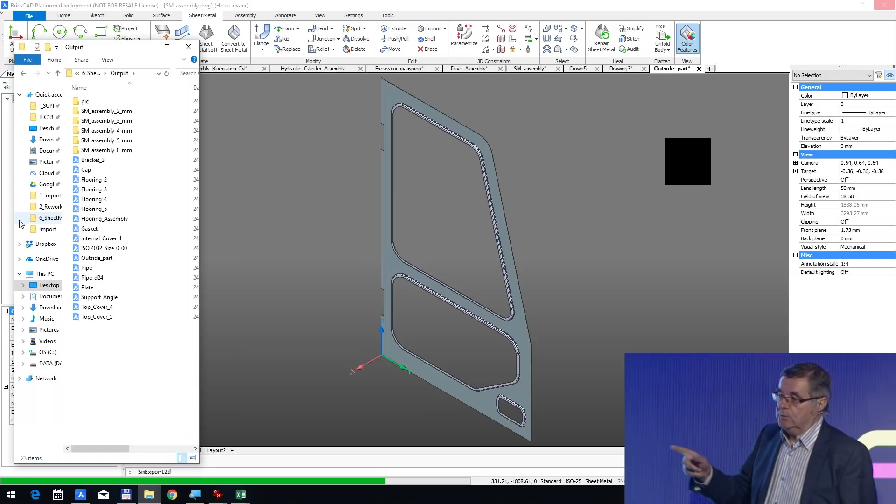And the system automatically creates different folders, and saves the DXF, the result of the unfolding, in the appropriate folder, sorted by thicknesses. The duration of this sequence is 3 minutes. 3 minutes for this assembly. You can imagine doing that manually. It would be a nightmare.

And most of the CAD systems today, if they can unfold correctly, do that manually. Another thing I have to insist on is that at the beginning, I didn't say if the assembly is our assembly or an assembly coming from outside. For us, it's exactly the same. We can do this sequence with our assembly. We can do that with a STEP file. That's very important.

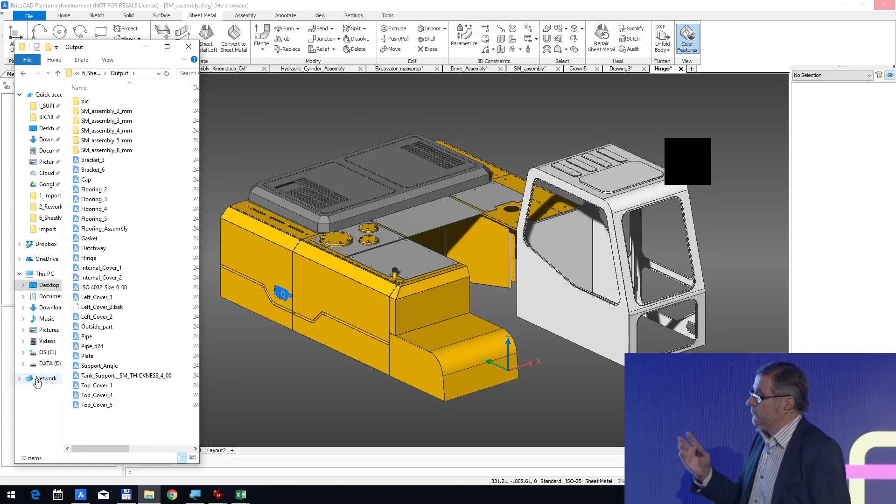We don't import a STEP file just to see. We can rework and make this complex batch with DWG, BricsCAD files, SolidWorks files, STEP files, and so on. So we will wait for the result. There are a lot of parts. So you see that's why it takes 3 minutes, 3 minutes and a half.

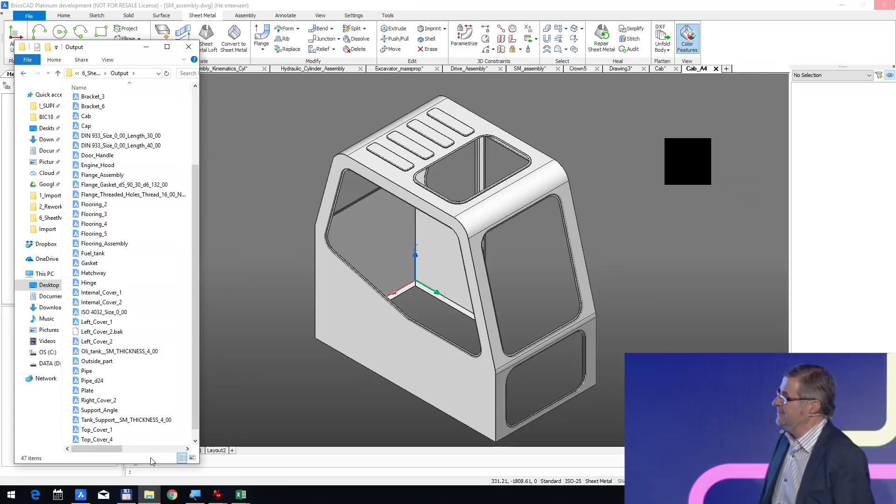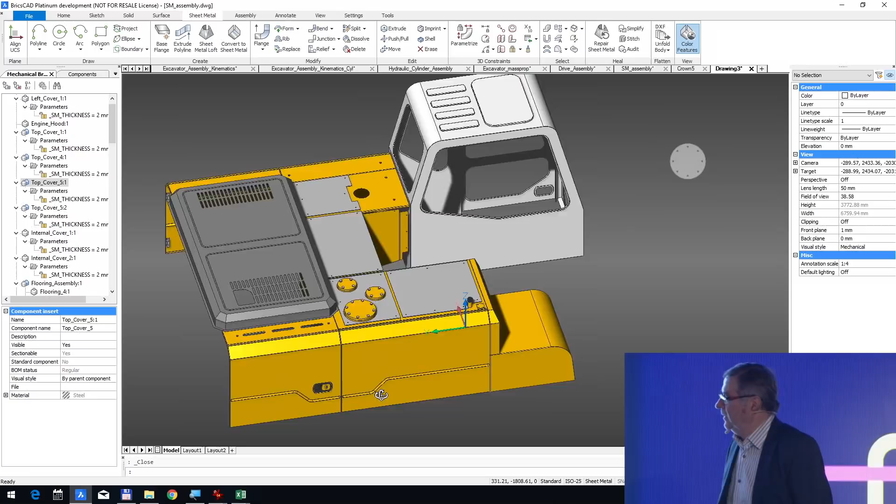It's time for a pause. BricsCAD works for you. Okay, there's still some. I will show you this unfolding. It's very beautiful. Oh. Oh no. You see our two parts. Okay.

Now let's see what we get. We get a report with sheet metal parts. All the sheet metal parts are unfolded, and we also get some parts that we call poor sheet metal. Poor sheet metal means it can be sheet metal, but there is a problem to convert or to unfold.

Ilya, can you show the unfolding of the cabin? So you see the kind of complex unfolding that we do. Okay, come back to the report. And then we have a problem with the part which is a poor sheet metal. This is a good example. So we will open it and see what happened.

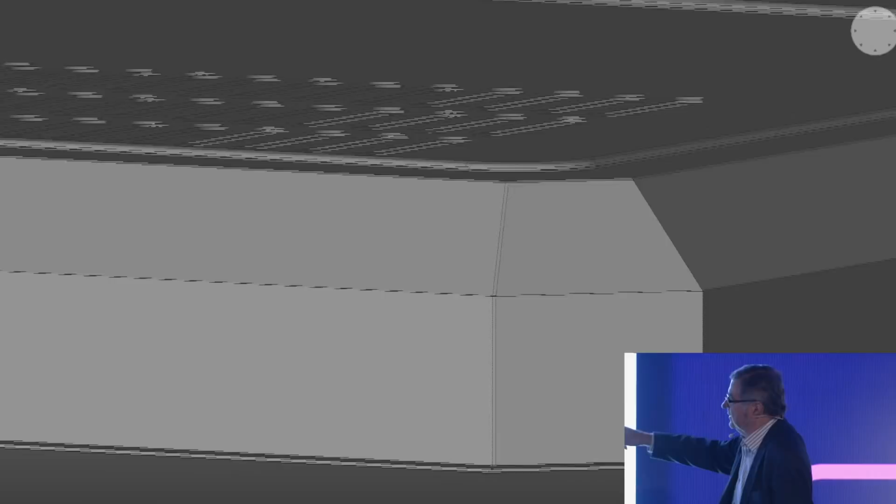If we zoom on the corner, we see that it is not sheet metal. It is just a solid, just a shell. And we will now use our tools, and we'll see that very quickly. We will select all the vertical and tilted lines and transform them into junctions.

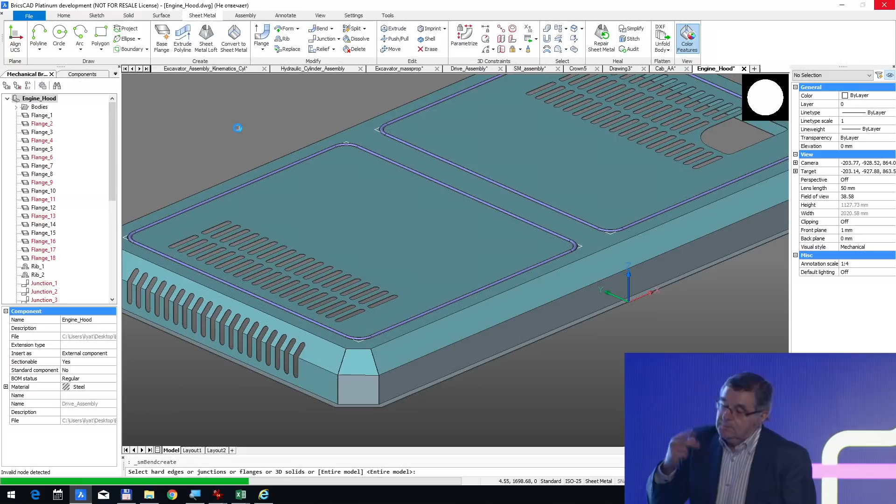Then you see that now we have junctions, and just by clicking on bend, the bends will be created automatically. So the junctions and the bends take about 2 seconds, maybe 3. So now we will use our smart split command, because we cannot unfold if we don't make those splits. Unfortunately, we have to do that 8 times because there are 8 corners. But this is quite quick.

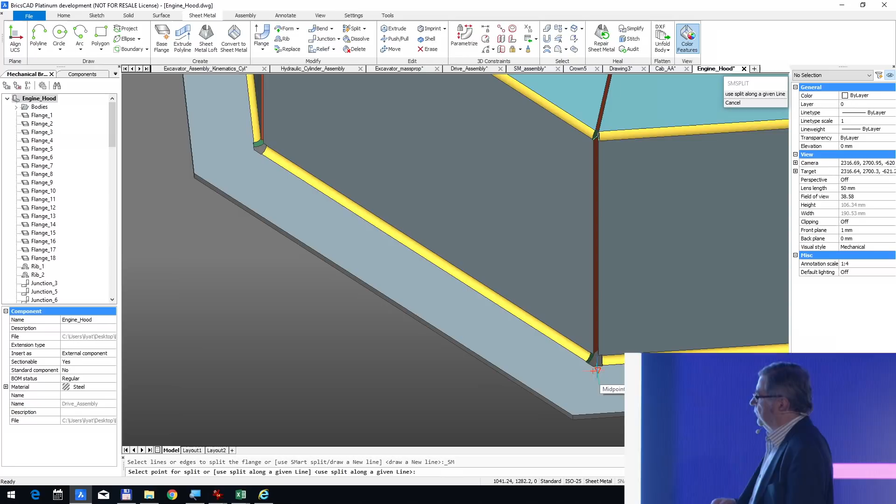And the part, of course, will be unfoldable. This is important. You see that this part is coming from, we don't know. It can be a STEP, it can be SolidWorks, it can be anything. But in 3 or 4 clicks, plus 8 because of the 8 corners, we create a correct sheet metal part. And then we can unfold. Okay, we have unfolded the part.

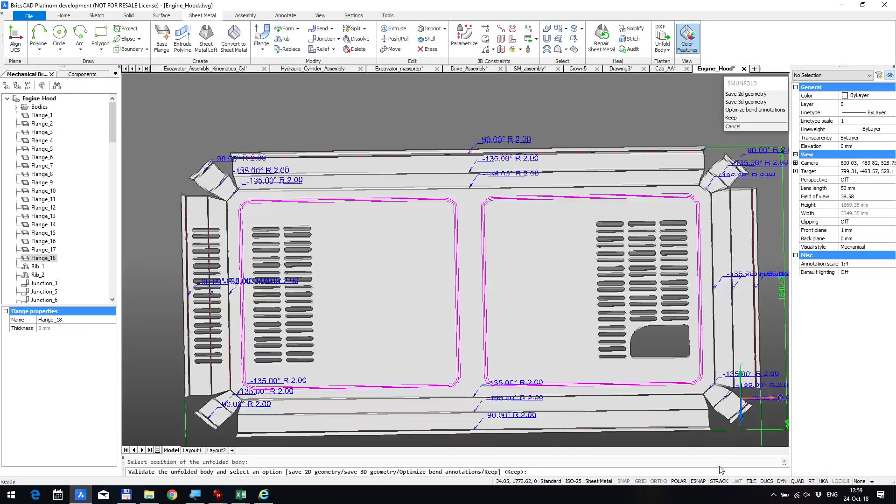So you see that we have completed those 3 goals. First, design. You have seen that it is quick to design from scratch, just 2 profiles, shell and split at the appropriate corners. Secondly, produce documents for manufacturing. This is just like that. You don't have anything to do. BricsCAD works for you. And if there is something in the imported model that is not sheet metal, we can rework and transform it into sheet metal. And this year, thanks to new features, it's faster than ever.